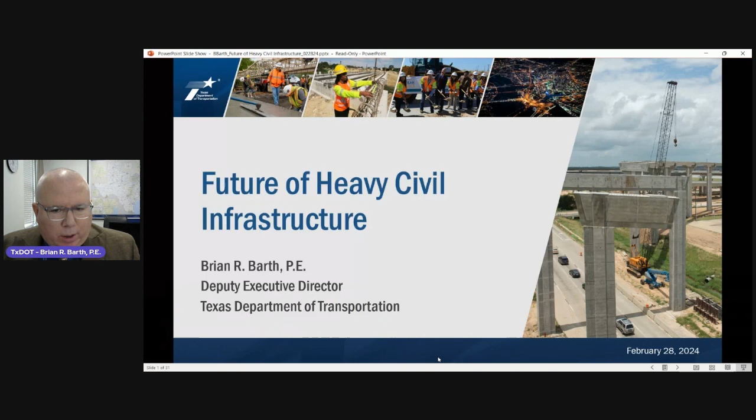What I'd like to do is talk through where we're going at the Texas Department of Transportation on our project delivery and construction program.

But first, let me talk through a few Texas stats. I think the first thing you're going to realize about me and Texans is that we're an arrogant bunch, so we like to brag a lot. And if you don't believe that, just sit around a little bit and we'll tell you about it.

We have 80,000 centerline miles of roadways across the state. We have over 56,000 bridges across the state, and one thing we're very proud of is that it's more than any state in the country, and we're very proud of the condition of our bridges. We typically rank in the top one or two spots in bridge condition, so we're very proud of that.

We have over 10,000 miles in our rural connectivity program, and we feel in the state of Texas that it's important to connect all parts of the state because all parts of the state provide something for our economic growth. Even though some areas aren't heavily populated, we still think it's important to connect those areas because they're producing something that's important to the rest of the state.

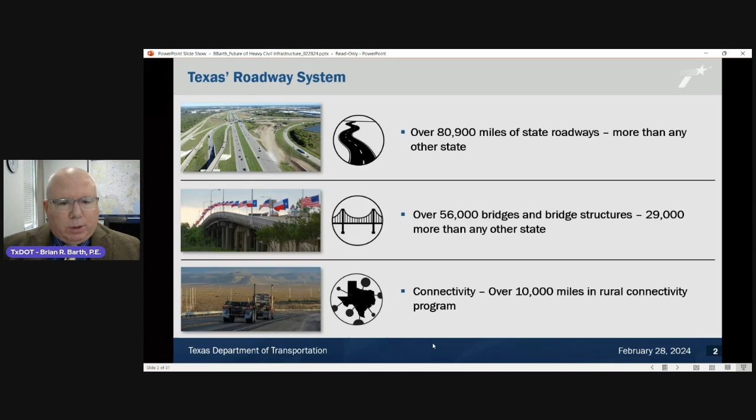Just a little bit about our population: we are still growing. We grow by almost 1,300 Texans per day. That population growth, 473,453, is something we have to deal with every day.

Another interesting thing is the percentage of that growth. There are three components of growth in Texas: one is more births than deaths, one is international migration, and one is domestic migration. Those three have very different characteristics, but I'll focus on domestic migration.

That component, the percentage of our growth, is growing more every day. Domestic migration means people migrating to Texas from other states. They bring vehicles with them day one, and they're driving on our roads day one, and we have to accommodate them.

Just a little bit about our program: we currently have over $39 billion of projects under construction throughout the state, and that's the most we've ever had. Tomorrow that number will grow, and that'll be the most we've ever had. It's mainly due to the financial resources our Texas legislature has provided us, and we're able to build this huge program—it's a huge opportunity for us to do a lot of great things across the state.

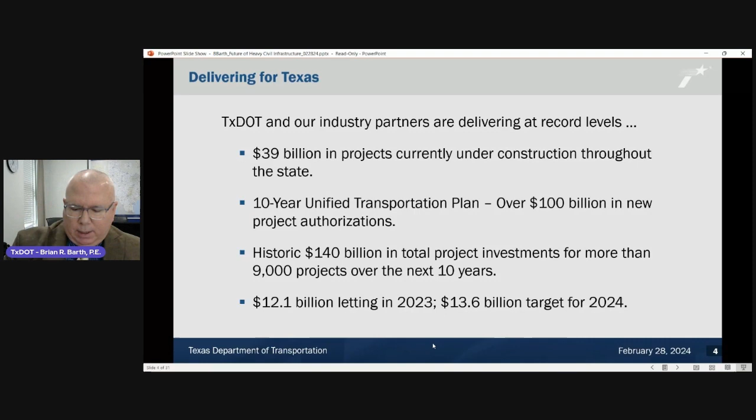In 2023, our annual letting was $12.1 billion. That was a record, and we are quickly going to break that record this year with a $13.6 billion target letting. So let's talk about how we're doing some of that.

The first thing I wanted to talk about is digital delivery. We are full speed ahead on getting to the point of delivering our projects without ever producing a hard copy set of plans. Currently, we're doing all of our design in 3D. We're trying to get to the point where we're releasing our 3D models to contractors pre-letting. We haven't gotten to that point yet where we're doing it on all projects, and that'll be a transition to get the industry accustomed to what we're providing.

So eventually we won't be presenting or producing hard copy plans. I think it's proven very beneficial to us, at least the 3D design, because we're able to see a lot of these things in advance—for example, identify utility conflicts, storm sewer conflicts, or footing foundation conflicts. It's really been a big asset to get our projects ready to go.

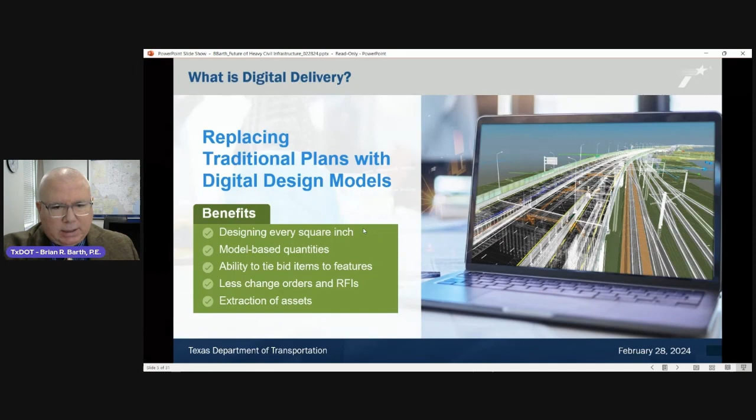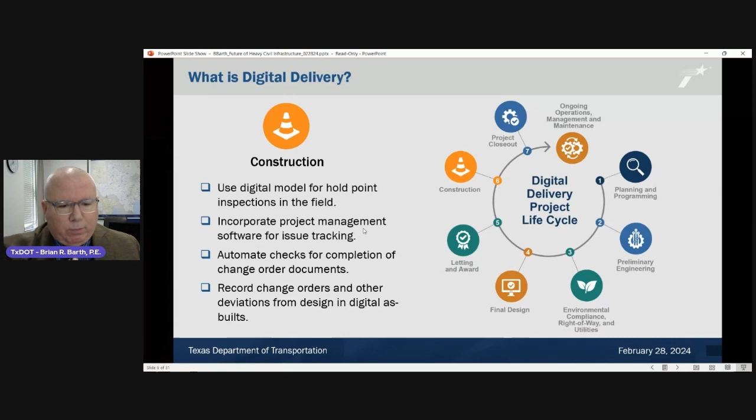I think we eventually want to take this full life cycle. This slide shows the construction part of it, but that circle of life on the right is the whole life cycle of our digital delivery. We've got to be thinking about this whole circle beforehand, because we really need to know what standards and what systems we're going to use for the ongoing asset management, operations, and maintenance of these facilities using these digital models, so that when we're producing them up front, we get all that correct and right.

This is our schedule. You can see where we started in earnest back in 2018. We've been working through, and we're working with industry, both the construction industry and the engineering industry, to make sure we're bringing everybody along. We fully understand that we're not cutting edge on this. There's been a lot of good work in this field, but we're really taking a deliberate approach to make sure

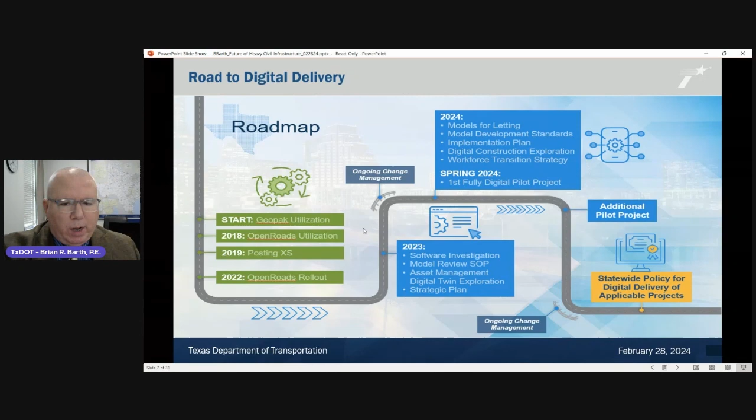we're not impacting our ability to deliver our program as we go through this. We do talk about in spring of 2024, in the top blue box, the first fully digital pilot project. We plan to let one project, a very small, basically pavement rehab cross-section type project, this spring. There will not be plans produced. We will be just providing the full digital model for the contractor community to bid on.

And so this is that project. It's our Farm to Market Road 1977. It's in our San Antonio district. You can see some of the tools that we're using there on the right.

I think an important thing to note is our contracting industry, we believed for a long time, was way ahead of us, because they were taking our 2D plans and creating 3D models to use out in the field. What we are finding, though, is that their own estimating crews weren't keeping up, and that's because they didn't need to, because we were producing 2D plans. So the industry needs to catch up a little bit on the estimating side. There's a lot of good contractors, and maybe you'll hear from some of those later today, that are ready to go full speed ahead. But we're taking a very deliberate approach not to leave anybody behind.

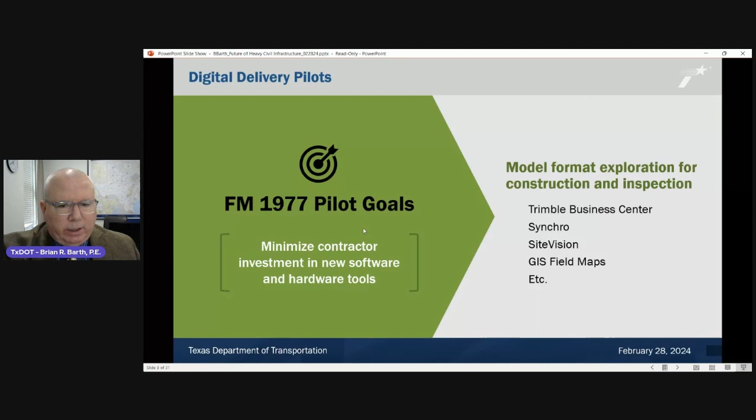This is just a little bit of that project. It is a very small project. In fact, I think the construction estimate is less than $5 million. So it's a very small project, but we wanted to try it on a small and easy project that's basically just a cross-section project. So more to come on that.

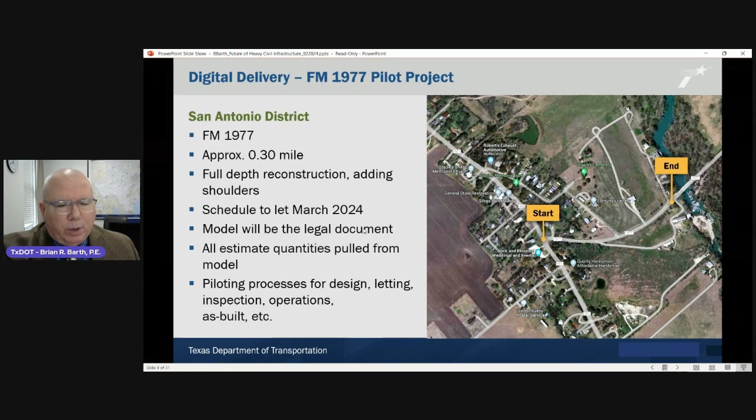And this is our schedule. We hope to let that in March. I think that may slip to June, just to make sure all the utilities are clear, but we're moving full speed ahead on that.

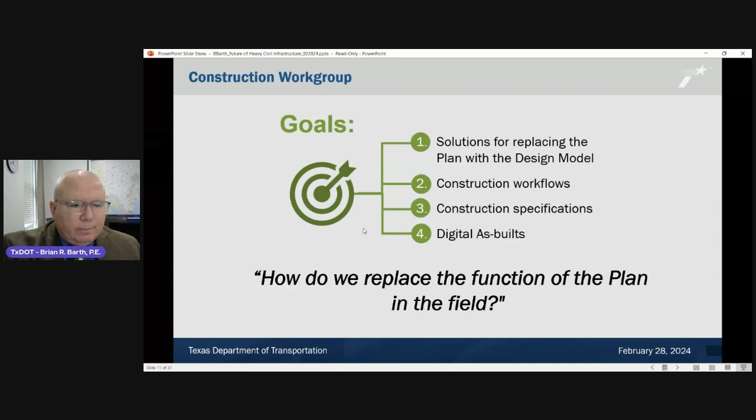It's not just what we do in design, creating the model, but how are we going to review these plans? What are we going to use out in the field to build these projects? So it's been a whole kind of life cycle of work that we're doing to get prepared to deliver this digital model.

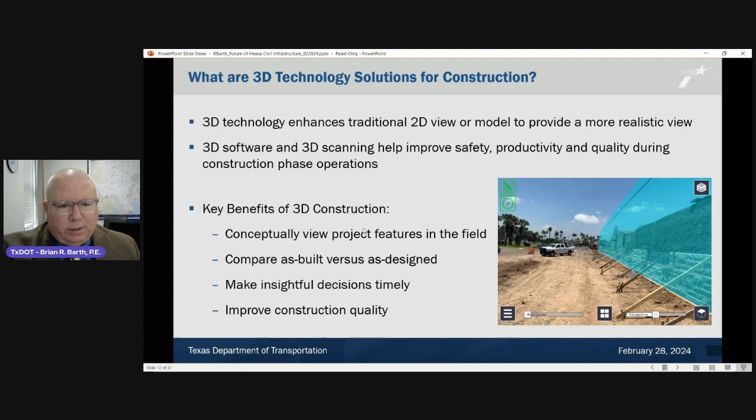I'm going to go through a few slides that just show some examples of how we're using the 3D models out in the field. The devices that we're using, either the tablets, or we've even seen some good quality work on an iPhone, in the field we can see things, and we can check foundation elevations. We can check offsets from center lines, and it's really impressive what the technology is enabling us to do out in the field.

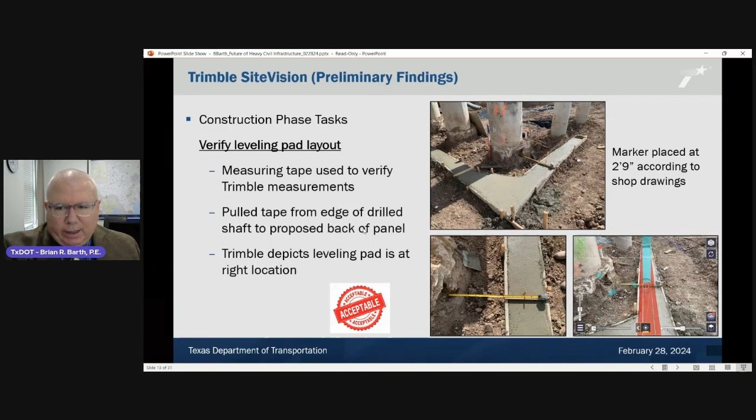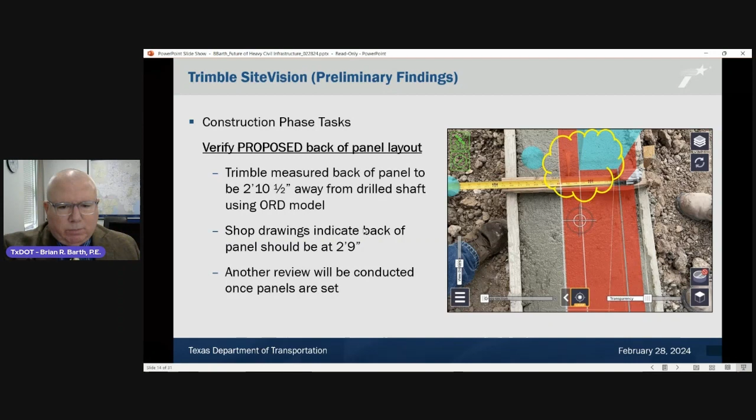Here's just an example of trying to tie down a leveling pad layout and what you can see on screen. Here's a close up of that, and so it's really making things easy out in the field. And again, we've got to make sure we have the technology devices for our field folks, or we're not going to get the full benefit of this.

Here's just an example of some of those devices, and I think some of our partners are up later on the agenda, so they could even tell you much more about all this than I can.

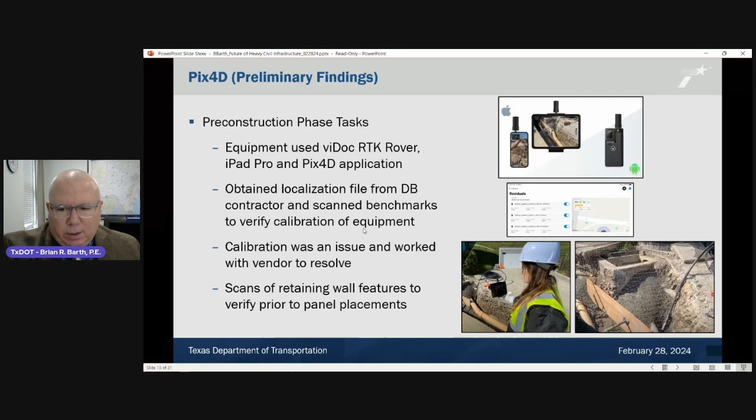But we really want to get to this digital twin where our system eventually, we have a digital twin for our entire system for not only things like asset management and making decisions on how we move forward with future projects, but also for things like when we have overweight, oversized loads going through, we're quickly able to check through the digital model that everything is fine. We're able to monitor changes in the environment because of storm events or hurricane events, things like that. So eventually we're going to get to the point where we have a digital twin of our entire system.

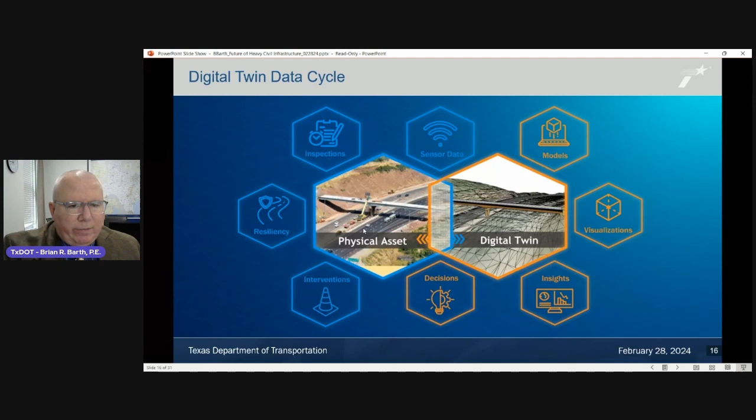And just here's some of the kind of the universe of terms that we're using for all this information.

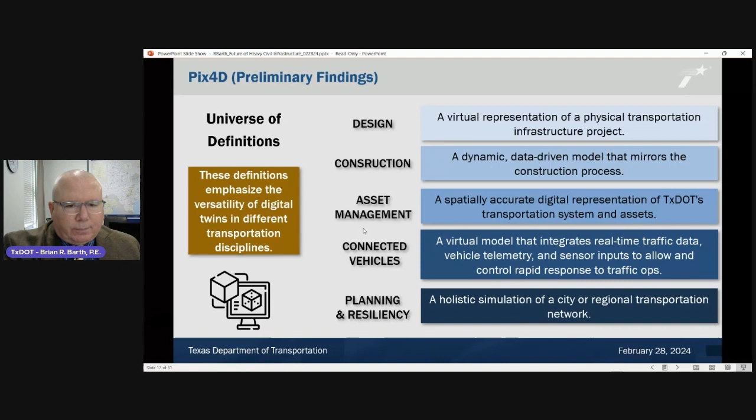Let me move on. So the next thing I want to talk about is how we're planning to use unmanned aerial systems. And again, what's driving this is the increase in technology and accuracy of lidar devices on these unmanned aerial systems, but also just safety. The more we can limit the exposure of our folks and our partners, the safer we can be.

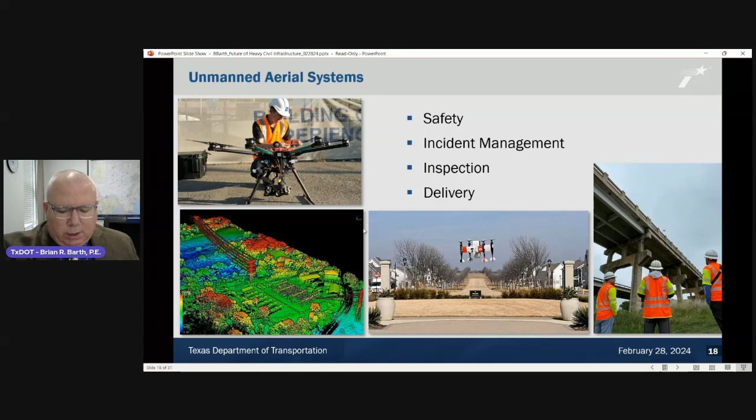And so these pictures are not TxDOT, or I don't believe they're in Texas. I'm not sure where they are, but this is what we're trying to avoid by using more automated and unmanned aerial systems to go to places that are dangerous and expose our folks to dangers, and we can just send the unmanned aerial systems to do bridge inspections and things like that.

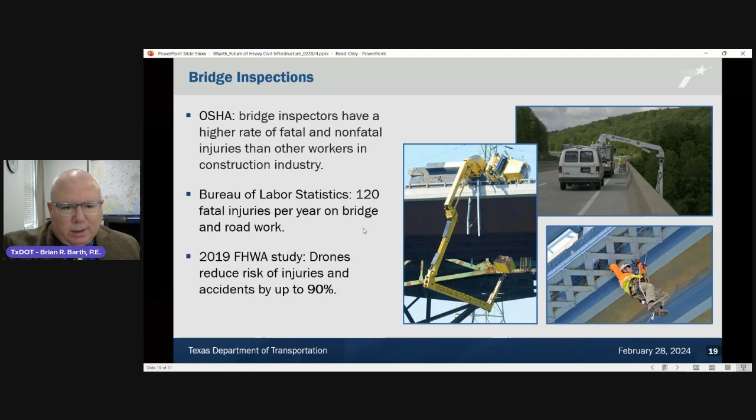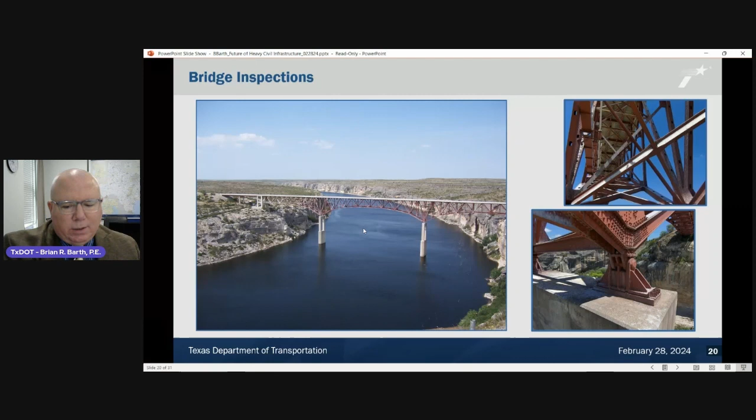So this is a Texas bridge, and it's an example of how those pictures on the right were taken by an unmanned aerial system, and you can really see how we can take advantage of those systems to do things safer.

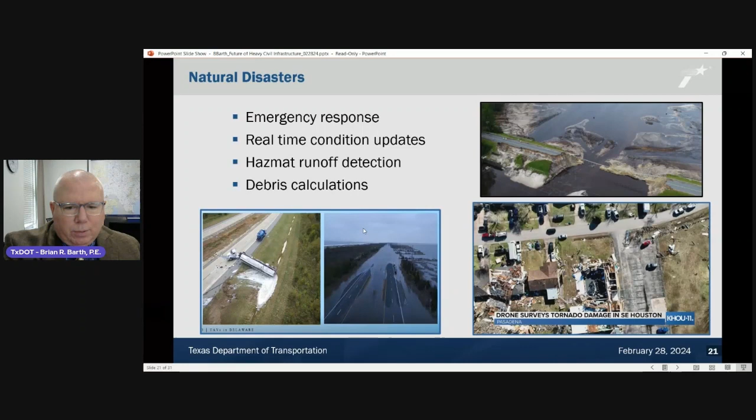The other things that unmanned aerial systems allow us to do is get to places that are tough to reach because of natural disasters. We can see where there's roadway damage. We can get to situations like that picture on the left, where there was a hazmat spill too dangerous to approach, so we sent an unmanned aerial device in there. The one on the right is a tornado in the southeast Houston area.

Moving on quickly, the other thing we're looking at is safety, and we're doing everything we can to reduce fatalities in our system. We have a goal to get to zero fatalities statewide by 2050. One of the things we're doing is looking at intersections, since that's where a lot of fatalities occur because of conflicting movements in typical intersections.

So we're looking at a lot of these new intersection designs, making sure we understand them and know exactly where the best place is to use these types of intersections, and then we're deploying them. So far we've had some great success.

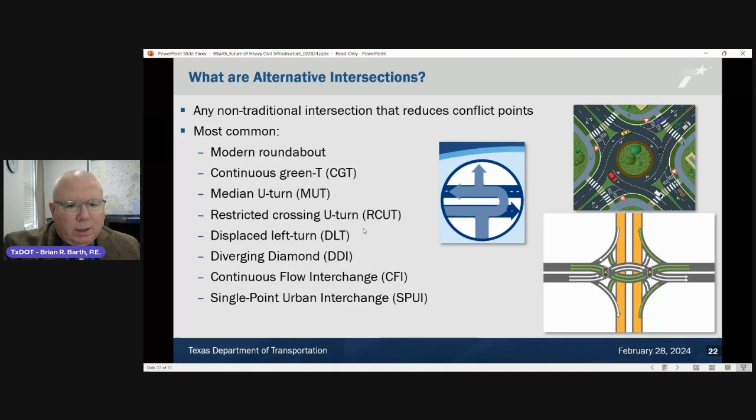Rob mentioned I spent some time in our Fort Worth district, where we built some roundabouts in series, and we really got some benefits: lower delay times through corridors, reduced fuel consumption, and less emissions. So not only are there huge safety benefits of roundabouts, but there can be big operational improvements.

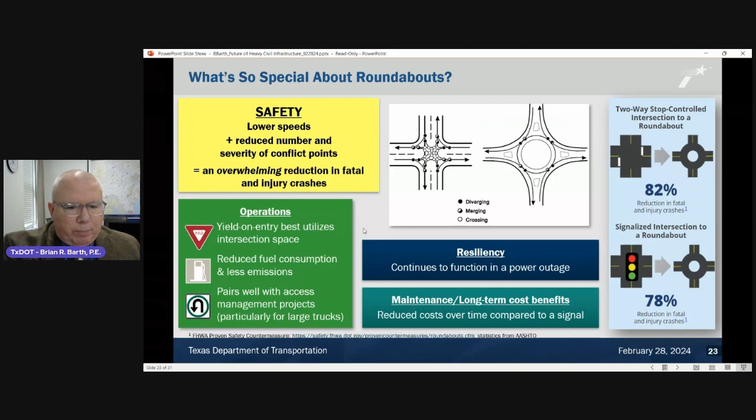Just a couple things we've found, and we're making sure we address these during design: there are things that can go wrong in a roundabout design, so it's important to have discipline and consistency in the design, including while it's being constructed.

We've seen some cases where decisions made in the field during roundabout construction meant some of the safety benefits weren't realized, because things like the speed slowing entry into roundabouts were changed. We've seen those reduced or altered in the field, which really had an impact on safety.

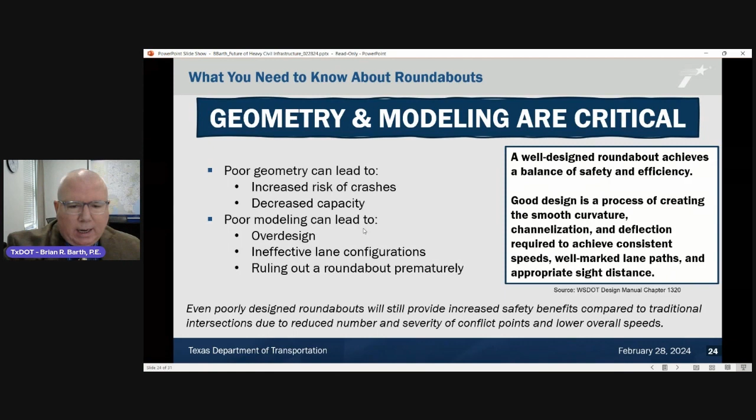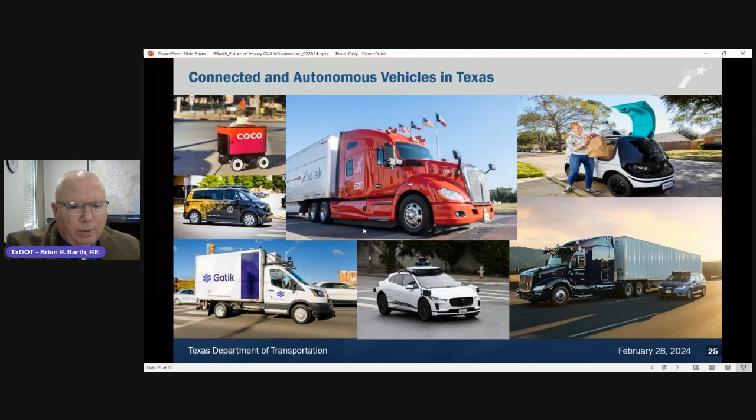We're continuing to work on some of our long haul freight corridors: I-10, I-20, I-35 north-south, I-40, and the I-45 corridor between Houston and Dallas. We've also got a pilot here in Austin on State Highway 130. These pilots are designed to test out connected and autonomous infrastructure we can put in the field that enables connected and autonomous freight and allows freight to move more efficiently through the state.

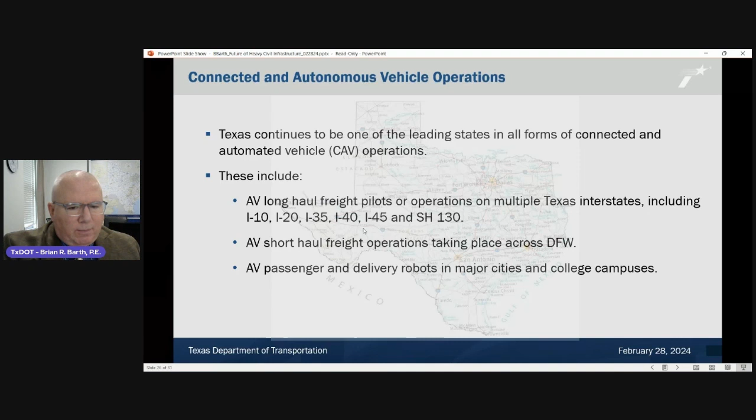We don't have all the answers. We're working with and partnering with a lot of really smart companies, but we're really trying to find out what the industry needs from a state DOT on our facilities to make all this work.

Here you can see some of those pilots across the state. We're kind of spread out, but we've got the Texas Triangle, from Dallas-Fort Worth down through Austin to San Antonio, and then east to Houston. A lot of that testing is going on in that Texas Triangle, where the majority of our population is.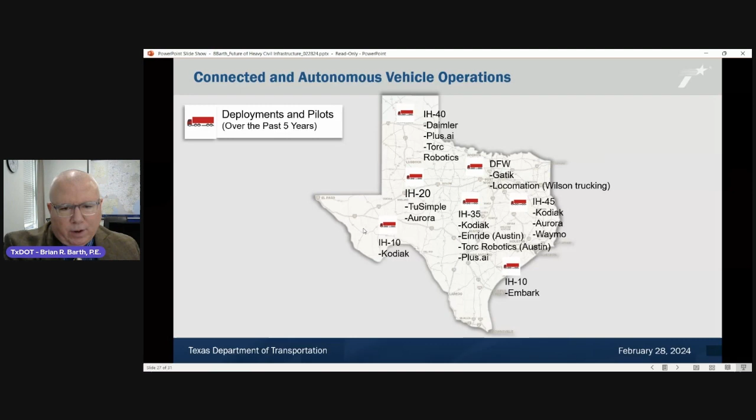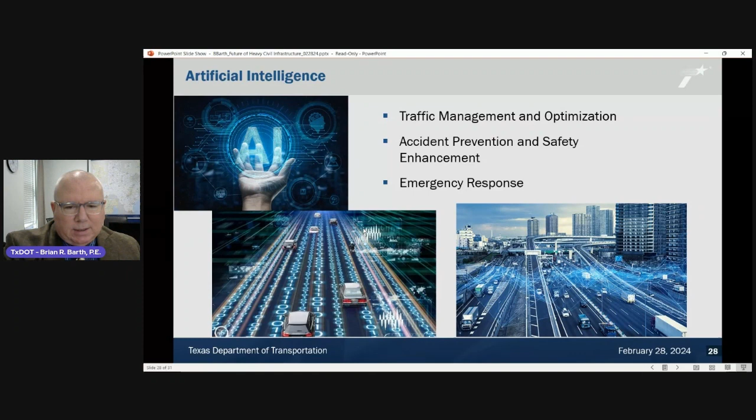Just a little bit about artificial intelligence. I heard somebody give a presentation saying artificial intelligence isn't artificial nor intelligent, but we're using machine learning to try to improve things. You can see here some of the things we're trying to look at.

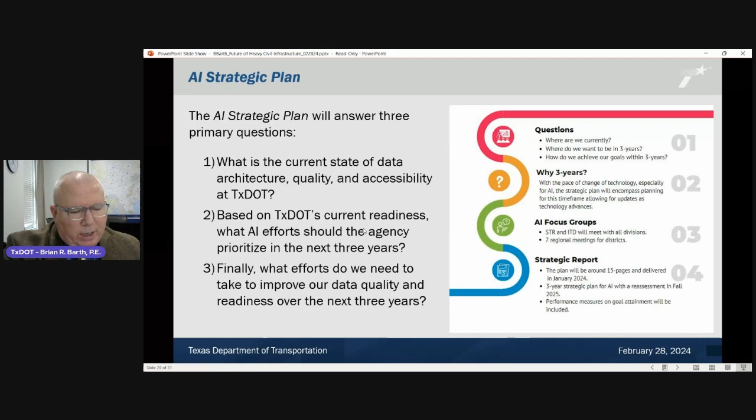One area we've looked at is our intelligent highway systems and our traffic management centers, and we're trying out a platform in Austin. In the Austin Traffic Management Center, we've tried an AI platform working with a partner, and we're able to get emergency response crews to incidents on average 11 minutes quicker using this system.

That means the world right there. Eleven minutes could be the difference in whether you save somebody's life, or get something cleared so you don't create other incidents. You just get out there quicker, and it's really proven beneficial already.

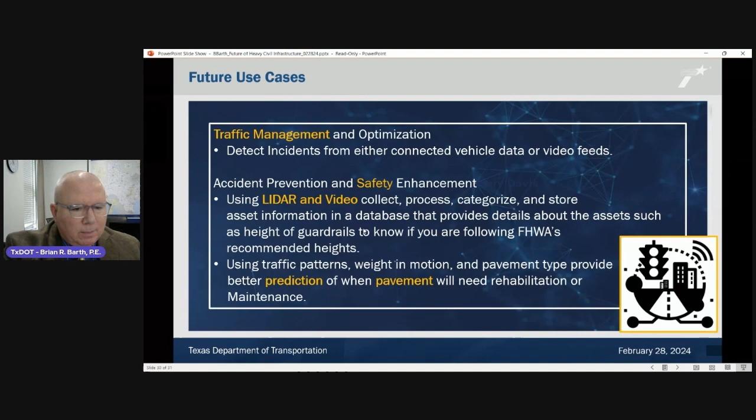We've got a lot to learn. Again, by no means am I or we the experts, but we like to work with a lot of smart people in the industry to help us along.

I'll add one last thing: all of this is geared towards ending the streak and lowering fatalities on our state highway system. We have the campaign in Texas—there has not been a deathless day on Texas roadways since November 7th, 2000, and we're really trying to work hard to end that streak.